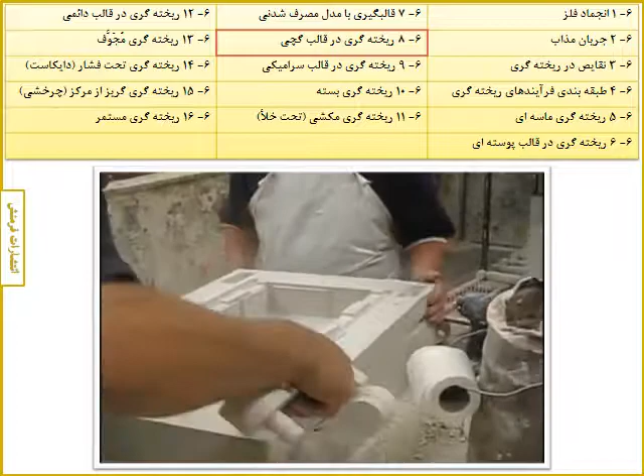That's the blast furnace there. They're heating up the bronze, melting it down, and then heating it up to a temperature of just a little over 2,000 degrees. They've got the molds of a new beginning inside this furnace, where they heat up the molds to match the temperature of the bronze, so we get an even flow of bronze. It also melts the wax out of the mold, which leaves a cavity inside the ceramic shell.

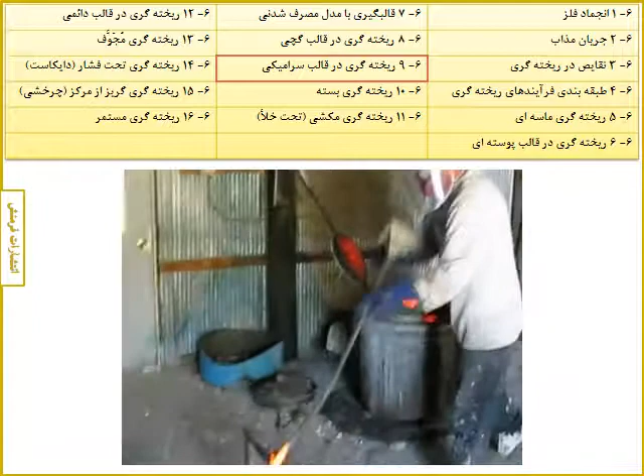What he's doing now is checking the temperature of the bronze. He sticks a thermometer down inside. The mold maker said the bronze has to be about 2,050 degrees before they pour. If you've never felt 2,000 degrees, you have no idea. Now they're getting dressed up because that bronze splatters on you, so you better be protected. The molds have to be about 1,600 degrees, and they're picking up with their hands, so you can imagine the kind of gloves they've got.

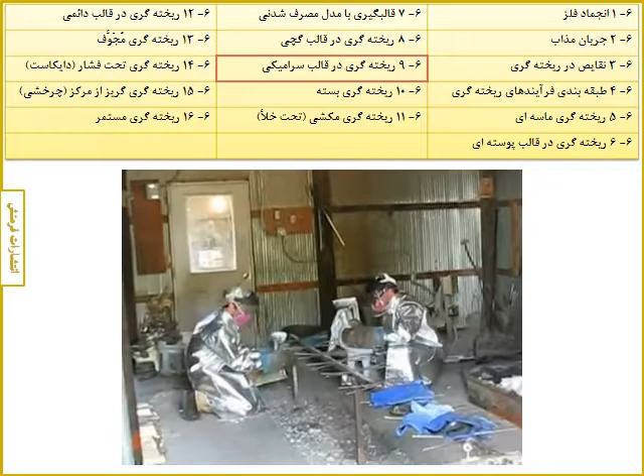There are the molds. That's with the cup down - that's the pouring cup on the bottom. That's the horse from A New Beginning, and they're hanging it by the cup on these hooks. Now it's hollow inside. Okay, go ahead.

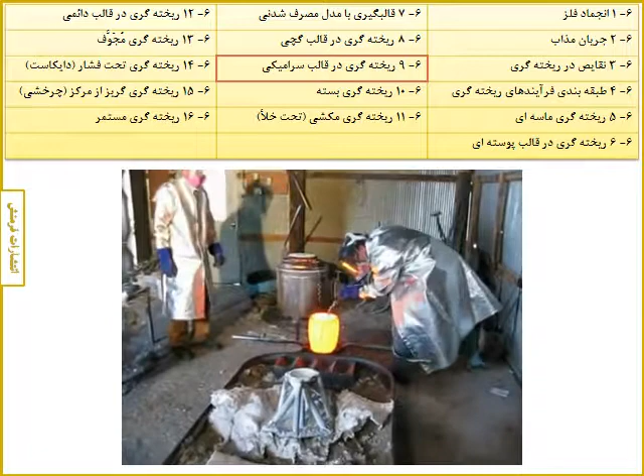I gotta tell you, that feels really hot right now. Now they're getting the plug off the top of it. Now they're going to pick it up with this device, and they'll carry it over and start pouring.

What he's doing is getting ready to put more bronze into the crucible so they can melt it down. All right, they're starting up the furnace again. It'll take about an hour for that to melt down. Now let me show you what it looks like inside the molds right now.

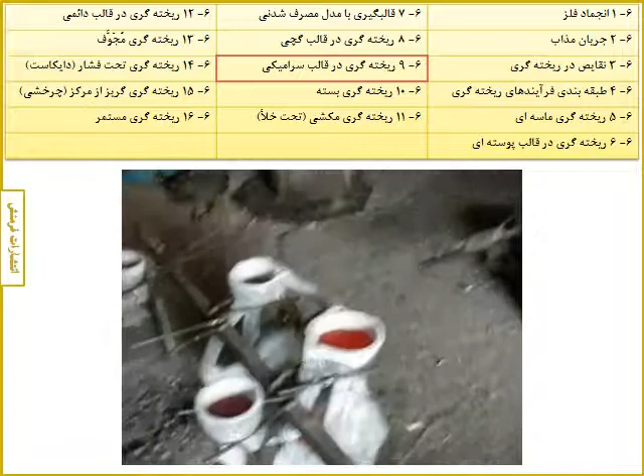That's the horse from this piece called A New Beginning, and this is the mountain man coming out now. They're bringing him out here to cool off. They're spraying it with water just to cool it down a little bit faster. The reason he's spraying water on it is because it takes out the hot spots. You don't want the bronze to cool unevenly, because then it cracks or bends or just distorts.

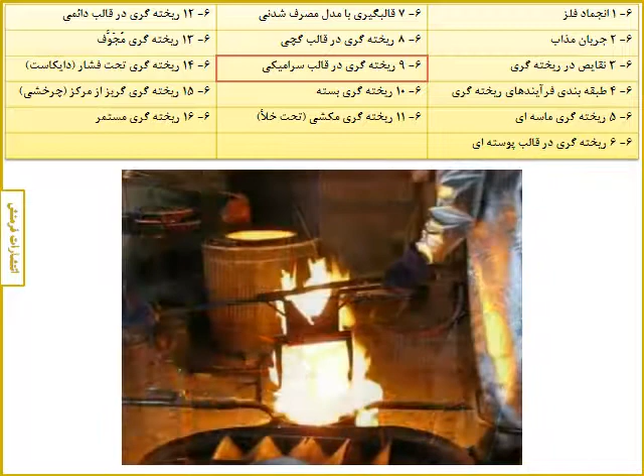More molds out to start cooling, heating them up. And there's the Indian woman from my piece under his arm there. That's the base for the mountain man and Indian woman, and that's the Indian woman right there. So they've got the molds in there. Now they'll close up the oven.

And then they'll start melting out the wax. You can see the smoke, and now we've got wax flowing into the pan. You can see that starting to fill up now.

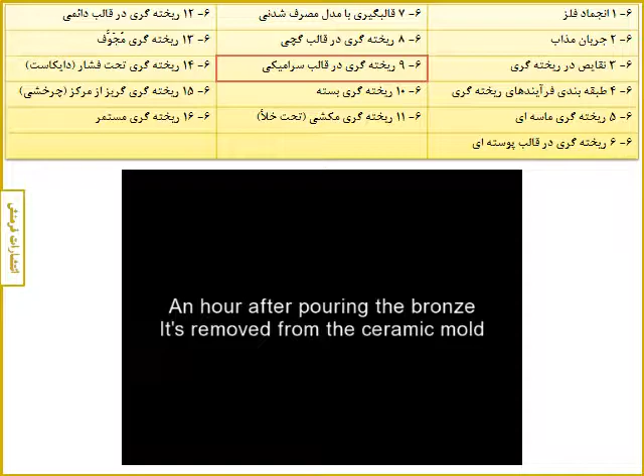Now you can see the mountain man starting to emerge now. So anyway, you can see how it's coming out of the mold now. Now this is the horse here.

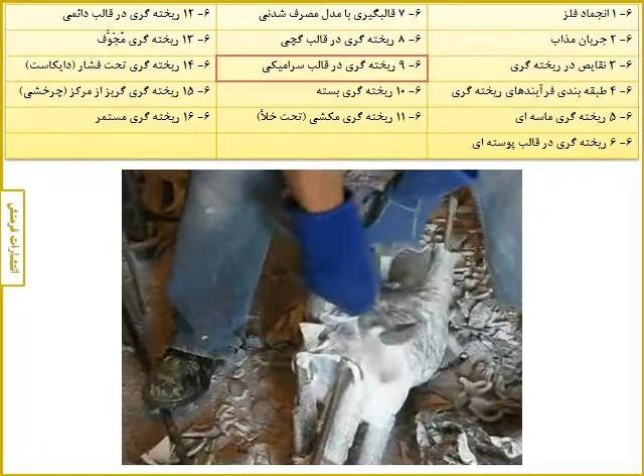This one's wrapped in chicken wire to give it strength. All right, I think that gives you the idea of what happens, and I'm going to let it go at that because he has to get back to mold casting, and I've got to get home. So that's it for today here at Northwest Art Casting.

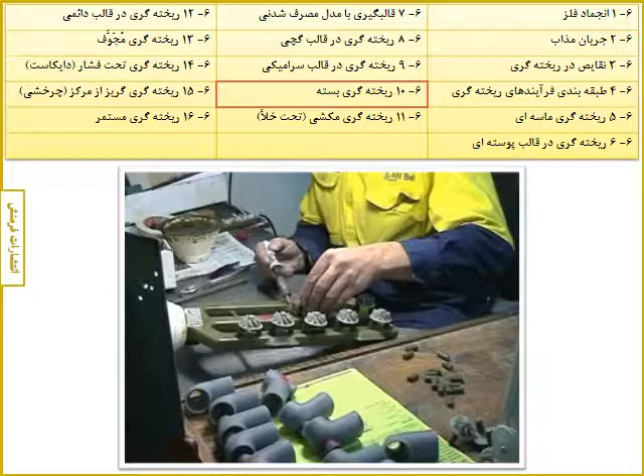A.W. Bell's in-house rapid prototyping process involves the use of 3D printers that can print wax and then incorporate the investment casting process to develop the finished product. Rapid prototyping enables us to be responsive to your need for fast, accurate metal parts. This process is ideal for small runs which can be delivered in as little as 2 weeks. Parts are produced from your CAD data, giving you control of the final part shape. The parts are inspected throughout the production process to ensure final size is as close to your specifications as possible. Rapid prototyping allows us to supply models in any material we cast, saving weeks and dollars at the development stage.

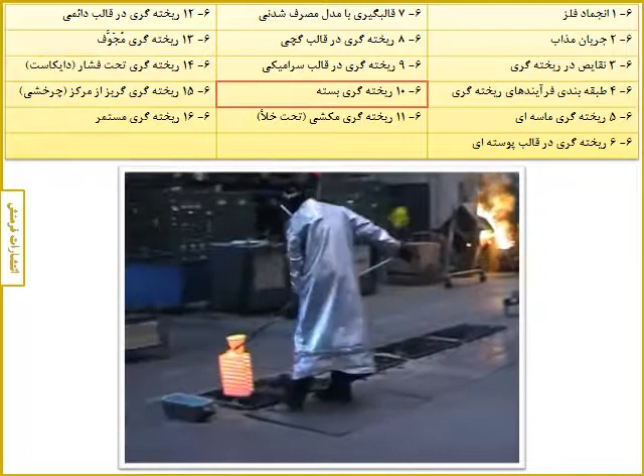A.W. Bell's investment casting process is ideal for creating near-net shape metal parts that require minimal machining, finishing or surface treatment. This saves time, money and material. Investment casting can produce complicated multiple part assemblies that are otherwise expensive or difficult to fabricate.

The investment casting process begins when wax replicas of the desired part are produced by injecting wax under pressure into a die. Depending on quantities required, we can use either a manual die for low volumes or fully automatic die for high volumes.

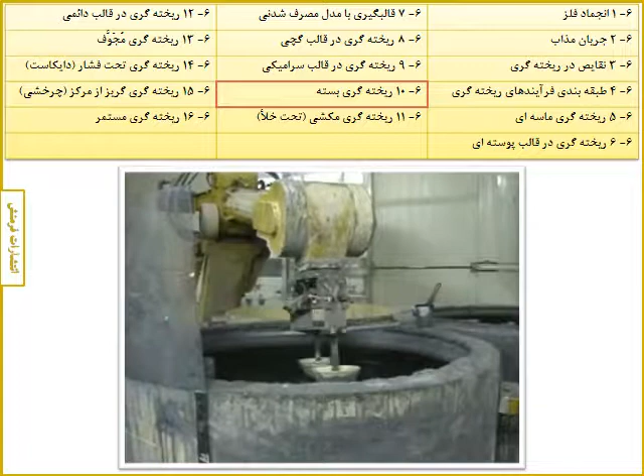The wax pattern is then attached to a wax tree, which is also the runner system for the flow of metal. The tree is dipped into a ceramic slurry and then into a bed of extremely fine sand. Up to 8 to 9 coats may be applied in order to get the desired shell thickness of approximately 6 to 8 millimeters.

Once the ceramic is dry and the desired shell thickness is achieved, the wax is melted out using a boilerclave. This leaves a negative impression of the part and runner system within the shell. The shell is placed in an oven where the last remaining wax is burnt out and the ceramic shell is fired.

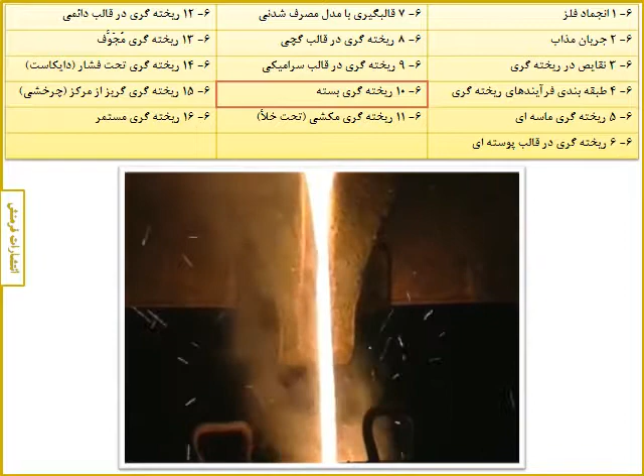Before casting, the shell is preheated and then placed into a fluidised sand bed. The metal, which is melted in an induction furnace, is then transferred to a ladle and gravity poured into the preheated shell.

After the molten metal has cooled, the ceramic shell is removed by vibrating or high pressure water blast. The castings are then removed from the tree through the use of high speed cut-off saws. The gates are then removed on a manual linishing machine for low volumes, or an automatic linishing machine for high volumes.

Some castings require a minimal amount of hand finishing or gauging at the inspection stage.

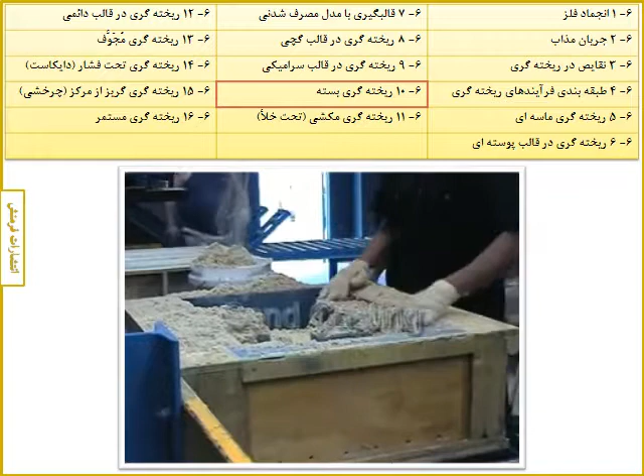A.W. Bell's sand casting facilities include a new mould line which is set up for low volume production quantities. Our flexibility allows us to cast almost any metal, ferrous or non-ferrous. The mould line is currently manufacturing sand moulds for sand casting production and prototype parts for the automotive industry.

A.W. Bell's pattern shop can produce highly accurate wood and Ureol patterns. We have the ability to produce general foundry patterns, production resin foundry patterns, zinc spray tooling for our investment casting facility, small to very large foam patterns for the press tool industries, and complex prototype patterns for the automotive industry.

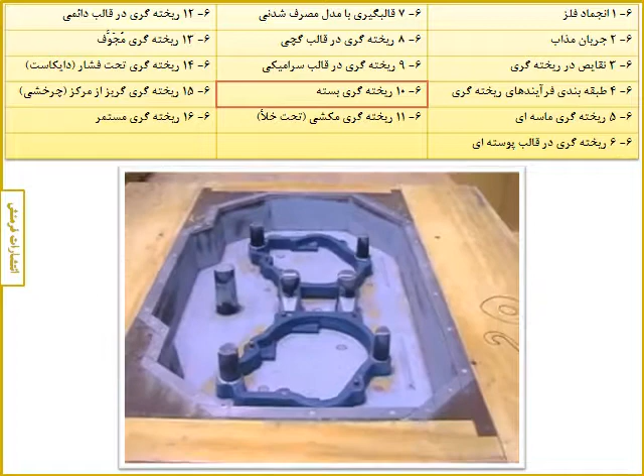A.W. Bell has a comprehensive tool making facility providing flexible solutions to your tooling needs. We use a variety of technologies including CAD/CAM, CNC machining, pattern making and rapid prototyping to provide tooling to meet your lead time and budget constraints.

A.W. Bell is a premier supplier of tooling for die cast machines, production sand casting, gravity die casting, wax injection moulding and other industries.

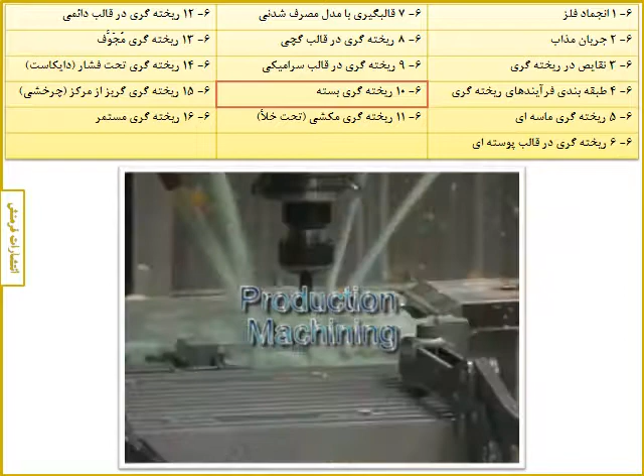A.W. Bell's production machining facility provides precision finishing of our castings to meet tight tolerance requirements. We can handle both continuous and batch production machining of parts large and small.

Bell Machinery manufactures specialised grinding machines and abrasive cut-off machines. Our grinders are ideal for repetitive grinding of castings in investment, die casting and sand casting foundries.

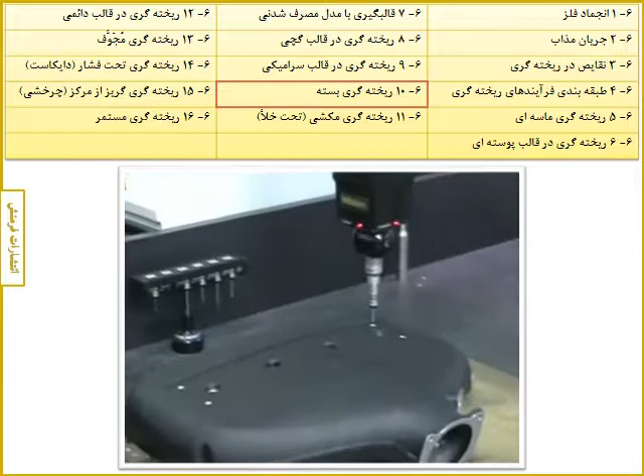A.W. Bell strives for continuous improvement in quality standards. Ongoing investment in state-of-the-art production, inspection and control equipment allows us to produce components with high accuracy and repeatability.

Our accreditation in ISO 9001 and ISO 14001 reflects our dedication to quality and the environment. Our commitment to quality ensures that the parts we manufacture meet your specifications.

The 3 CMM machines run by our quality department are just a part of A.W. Bell's comprehensive quality strategy.

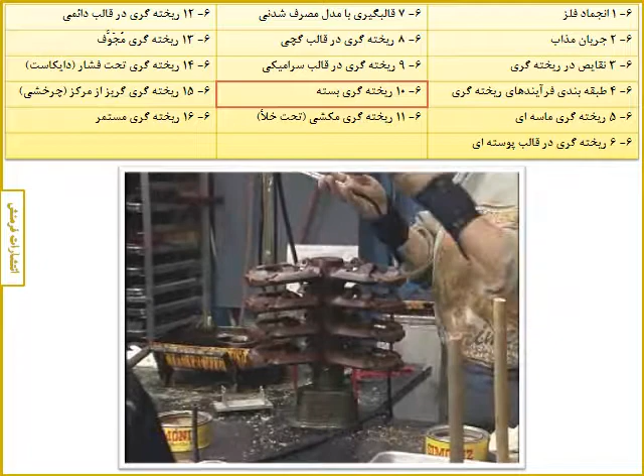Investment casting patterns are made by injection molding. These patterns are assembled onto a wax post connected to a pouring cup. This pattern assembly, called a tree, usually incorporates complex runner systems to assist metal flow in the investment casting process.

The shell mold is produced by dipping the pattern assembly several times in slurry and allowing it to dry between dips. The first slurry mixture consists of fine particles for smoothness. Subsequent dips are mixed with coarse particles to quickly build up thickness and provide strength.

The wax is removed from the mold by melt-out in a furnace or autoclave. Then the mold is fired to remove moisture, cure the ceramic, and to preheat it for pouring.

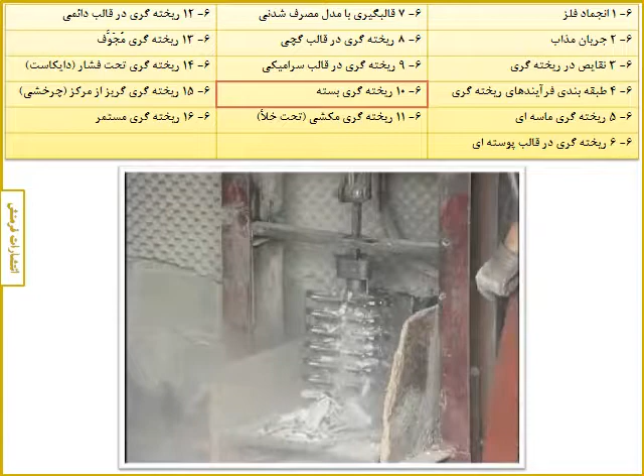Both ferrous and non-ferrous metals can be investment cast. Once the metal has solidified, the mold is broken and the casting removed. The main advantage of investment casting is the complexity of shapes that can be cast to close tolerances, thin walls, and smooth finishes.

The master model can be made of almost any material: metal, wood, or any of the current modeling techniques. Anything which won't hinder the silicon rubber from hardening.

Tape is placed on the master and colored to form a split line that will be visible through the silicon rubber. The master is then suspended in a casting frame and rods inserted to form the gate and provide venting during casting.

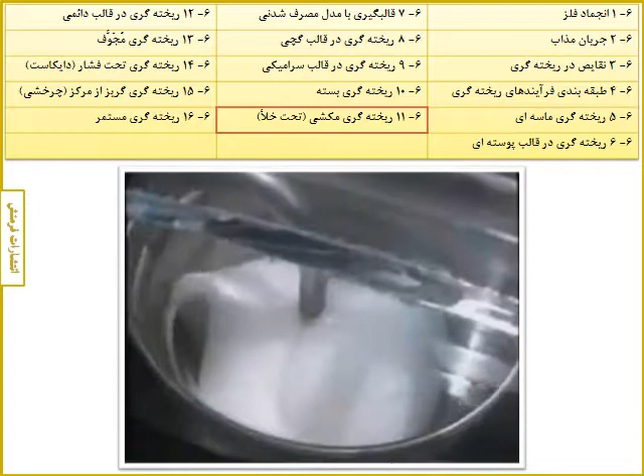MCP silicon rubber is mixed under vacuum, then slowly poured over the model. The frame is placed in the vacuum chamber and allowed to defoam until all air bubbles are removed. The silicon rubber is cured in the oven, then opened to reveal an exact replica of the master model, a silicon tool.

To cast a prototype, a release agent is applied to the surface of the tool, and the two halves clamped firmly together. After warming in the oven, the tool is placed in the casting chamber.

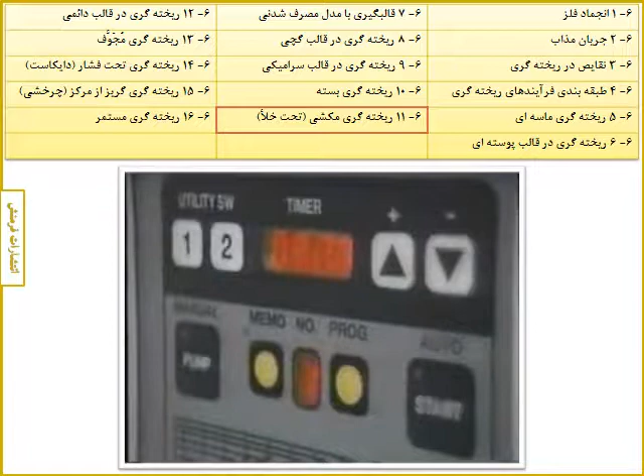Resin components are carefully measured, and colouring pigment added if required. The resin is then mixed to a programmed cycle time. When the vacuum reaches maximum level, the two components are automatically mixed together.

And the resin is cast into the silicon tool. The vacuum is then leaked, and the incoming air pressurizes the resin to ensure complete filling of the cavity. When fully cured, the prototype is carefully removed, and the tool is ready to be used again.

Hand finishing is necessary to remove the vents and gates. The result is a prototype of high quality with a flawless finish.

Proven materials, thorough training, and ongoing technical support gives you consistent quality every time. Insist on the best.

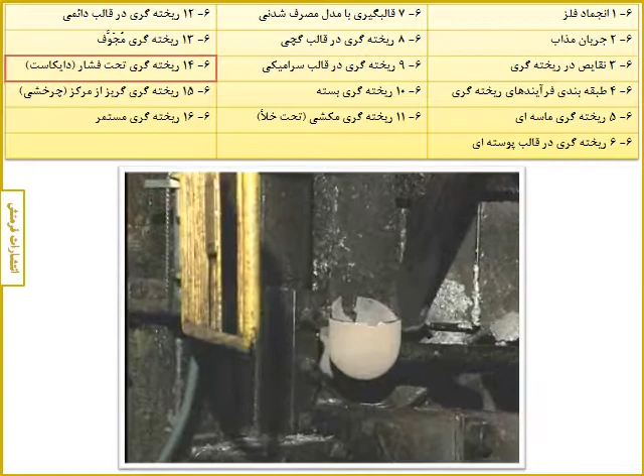The charge is poured ahead of the plunger tip through a pour hole in the shot sleeve. As the plunger advances, it closes the pour hole and drives the molten metal into the die.

Injection pressures may range to 10,000 pounds per square inch, or 69 megapascals, for aluminum and magnesium, although some machines can provide still greater pressures. After the metal in the die solidifies and the die halves are separating, the plunger thrusts forward, extending the plunger tip past the cover die. This pushes the biscuit that solidifies at the end of the shot sleeve, assisting casting release.

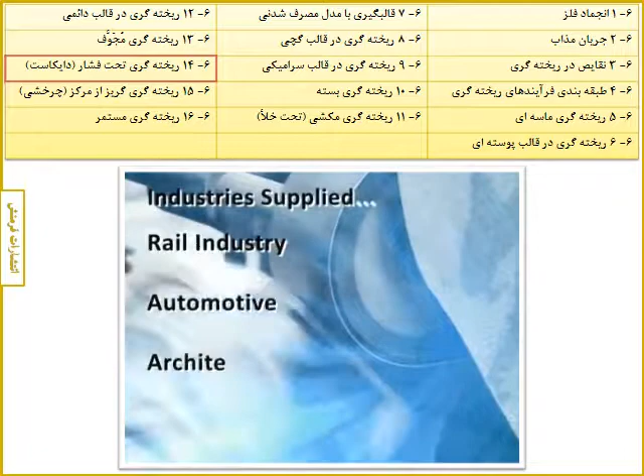Supplying to a vast market sector, including the rail industry, automotive, architectural and product development in the aerospace industry. The company prides itself on customer focus, from die design stage and prototype development work, utilizing full CAD/CAM 3D modeling, right through to finished CNC machined, painted, plated, assembled and tested products, always with a keen eye on continuous improvement.

Advising on component design, which enables the very best results, accepting data in many forms, including IGES, AutoCAD, DXF, Parasolid and STEP, to name but a few.

RD Castings has an extensive in-house tool room providing the design and manufacture of CNC jigs, fixtures and precision press tools. These facilities provide for a high standard of maintenance to all customers' tooling.

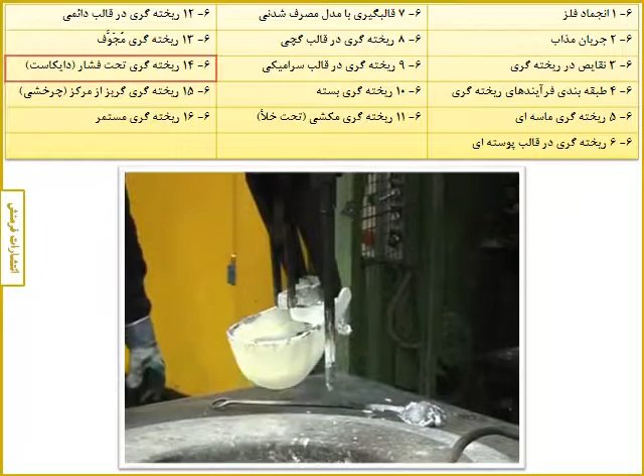Supplying both aluminium and zinc die castings in many different material specifications from 10 grams to 10 kilograms. The vast range of machines varies from 30 to 400 tons, including computer-controlled technology enabling flash-free castings, and with the added ability to vacuum cast, ensuring virtually porous-free castings. A process suitable for short, medium and long runs, sufficient to cover the needs of every customer now and in the foreseeable future.

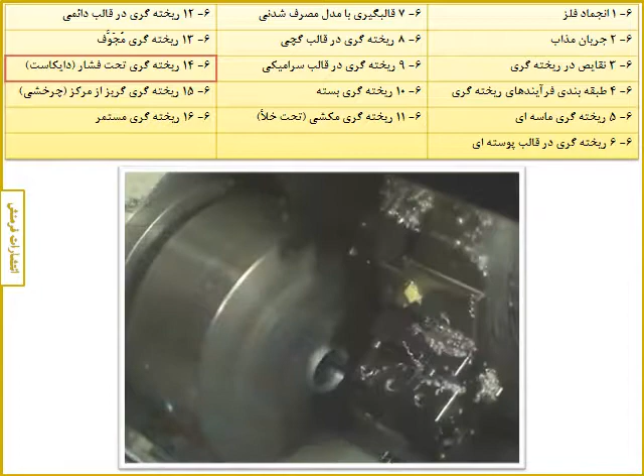At RD Castings, secondary machining operations are carried out on Brother high-speed twin-pallet machining centres fitted with high-speed Nikken 4th axis. All machines are programmed offline with a DNC link to increase productivity. Alongside our CNC milling department, we have a new CNC turning section incorporating the latest Mazak Quick Turn 250 turret lathe, covering all turning requirements.

Castings are finished with the aid of a fully automated vibration system and a fully automated shot peen machine. Collectively, these facilities have enabled customers to benefit from great savings over other conventional methods of manufacture.

RD Castings employ the latest high-tech computerized inspection facility, including a 3D coordinate measuring machine fitted with the latest Mitutoyo software. X-ray scanning can be arranged where required, along with full SPC and CPK stats, all of which are carried out in accordance with BSEN ISO 9001, along with a total commitment to the environment.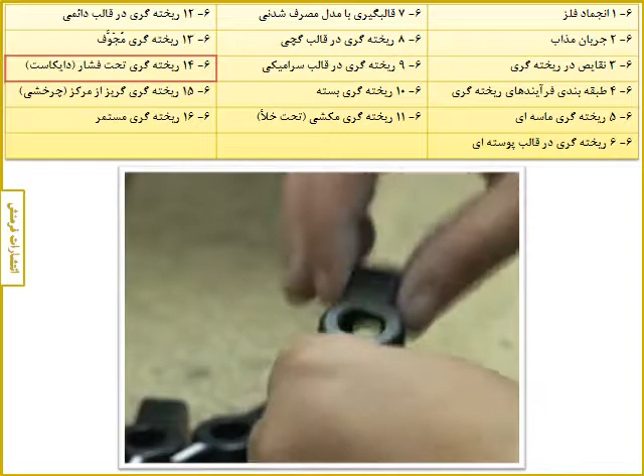Utilizing their own fleet, RD Castings distributes nationwide as well as globally via international carriers, a company dedicated to quality and customer service, delivering straight to line side when required, a complete all-round service. Kanban and JIT supplies are also available, ensuring complete customer satisfaction.

RD Castings, casting a good impression around the world.

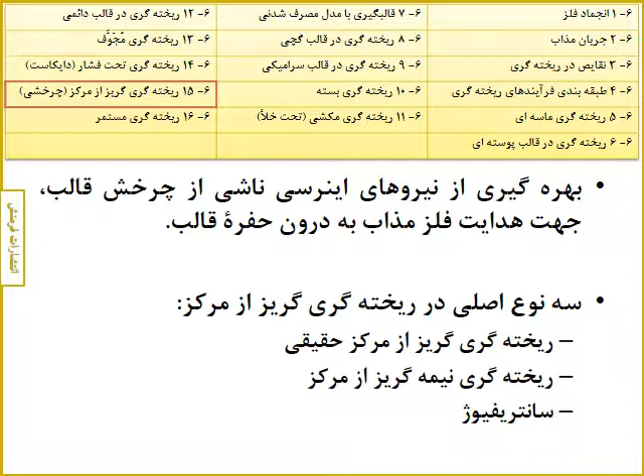Centrifugal casting is a metal casting process that produces a very high-quality product. Spuncast Incorporated is an industry leader in this field due to its commitment to quality and service. Since 1976, Spuncast has been using the centrifugal process to cast steel and stainless steel tubing, roll bodies, flanges, hydraulic cylinder bodies, and much more.

The spinning casting fills any shrinkage voids under high pressure from centrifugal force. Slag, dirt, and dross, being of lower density than the metal, spin to the bore or center. The result is a very clean, very dense, very uniform casting. Once the casting is complete, the tube is machined to remove the impurities that spun to the center during the casting process. Spuncast uses its vast metallurgical expertise to partner with its customers to improve products and processes.

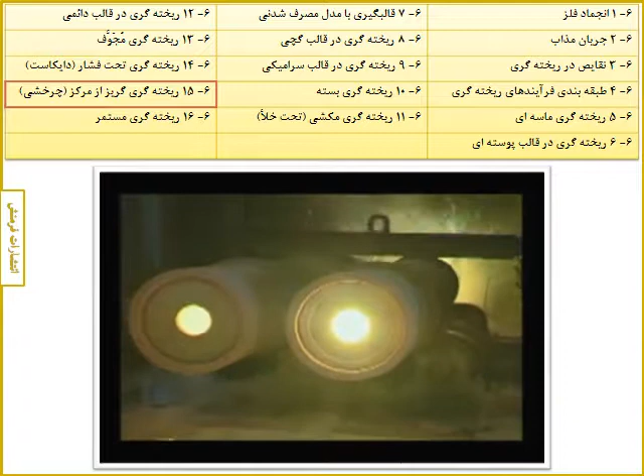Spuncast gauges its success by its ability to contribute to its customers. Solutions are what customers want, and SpunCast delivers on time, every time. That's what keeps existing customers coming back for more and brings new customers in the door.

SpunCast has been ISO certified since 2003. In August 2009, SpunCast upgraded its quality systems to the ISO 9001-2008 quality certification. Continuous improvement is very important to SpunCast, from operations to customer service.

SpunCast's future is about growth into new world markets. This means successfully competing in the global marketplace. It all boils down to building good relationships and trust. Building strong relationships with its employees, customers, and suppliers will continue to fuel SpunCast's success.

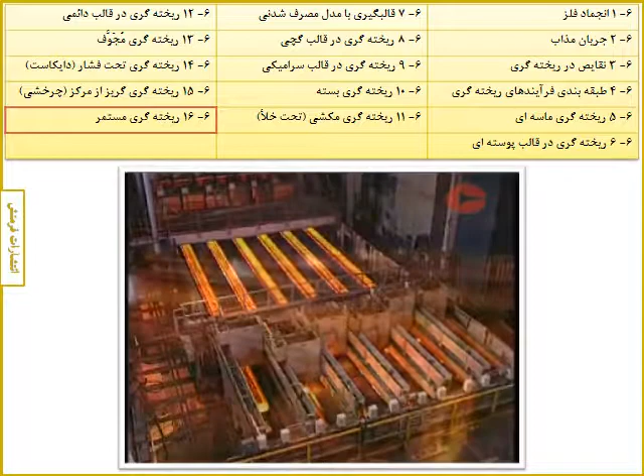Continuous casting is the process used to solidify the molten steel ready for shaping into a huge range of final products. A ladle of steel is teemed, or poured, through a gas-tight refractory tube into a tundish. The tundish is a reservoir that allows the steel to flow at a controlled rate through further gas-tight refractory tubes and into a series of water-cooled copper moulds.

With only the outer shell solidified, the steel is drawn from the bottom of the mould through a curved arrangement of support rolls and water sprays. It emerges horizontally in the form of a solid steel strand. At this point, it is cut to length using automatic gas burners.

Depending on their size, these solid shapes are called billets, blooms, or slabs, and are now ready for shaping into finished products.